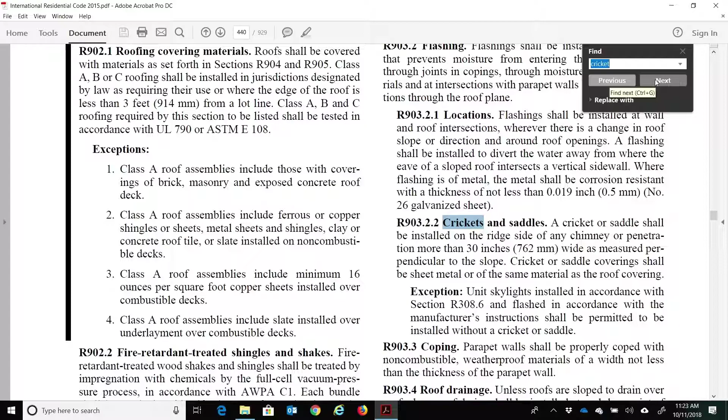When you take the certification exam, for the code part, the IRC part, it's a 30-question open book exam. You can use either the paper copy or the digital copy, but it's open book - you just need to know how to work your way through the code.

So that's what we're going to do in this presentation - we're going to teach you how to navigate through the IRC. It's important, though, for you as a chimney service technician to be familiar with what's in effect in your service area at home where you work.

That may not be NFPA 211, that may not be the International Residential Code. Nonetheless, technicians should be familiar with both of those documents, particularly NFPA 211, even if it's not in effect where you work. Our industry has adopted portions of NFPA, particularly the chimney inspection section, as kind of our standard. But again, you need to determine what's in effect in the areas you work in, obtain a copy of that code, and be familiar with it.

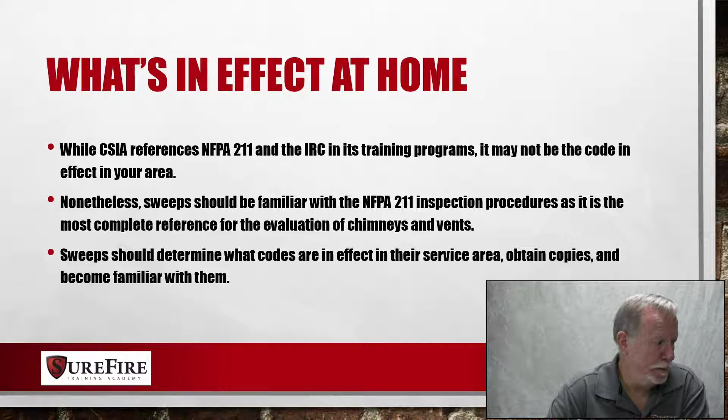So my challenge to you, if you're sitting here watching this seminar and don't know exactly what code is in effect where you work and what year edition - because most codes are updated every 3 years - make sure you have that information, make sure you have a copy of the code, and review it to be reasonably familiar with it. That's very important, particularly if you're doing any type of installation work. Your installations need to follow the current codes in the area where you work.

Just because somebody publishes a book, for example the International Residential Code, and it's available for sale, that doesn't mean that code is in force all over the world as 'international' would suggest. Codes must be adopted by some legislative body before they carry the force of law, and that might be your state government, the city or county level, or even the township level.

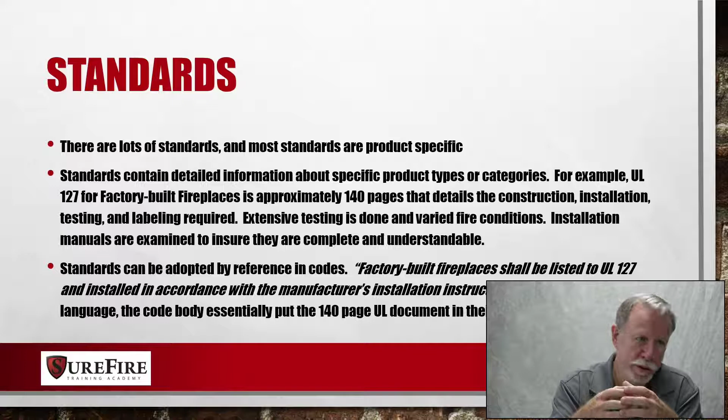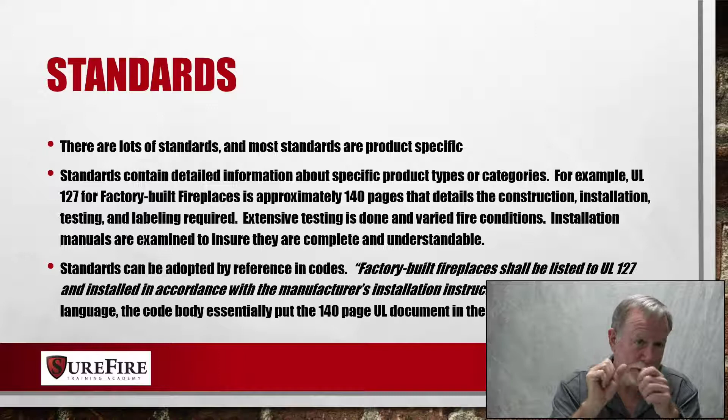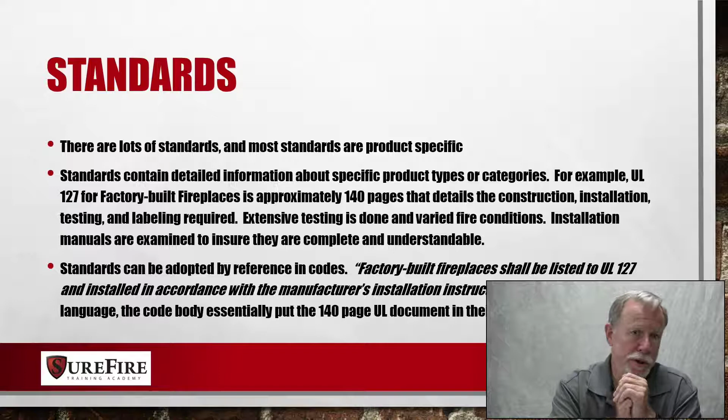The other thing is, in lots of codes, the International Residential Code, NFPA 211, they make reference to those standards. For example, the section on factory-built fireplaces in the code can be fairly short. It'll say something to the effect of: factory-built fireplaces should be tested and listed to UL 127 and installed in accordance with the manufacturer's instructions. By making that one reference in the code, they are able to bring in essentially all of the requirements from that UL 127 standard.

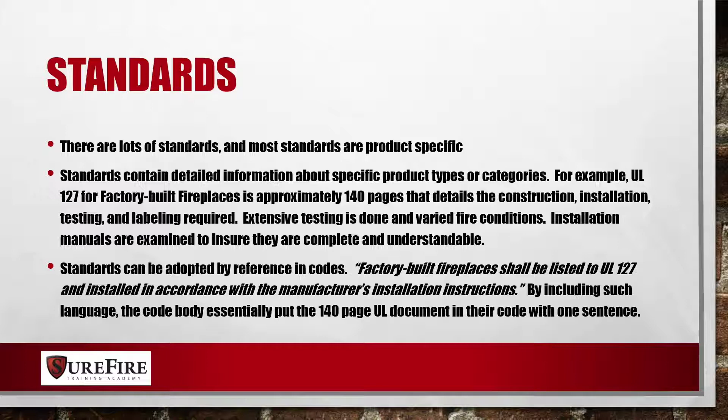Okay, let's look at some of the other standards available. UL 103 is the standard for factory-built chimneys. As already mentioned, UL 127 is the standard for factory-built fireplaces. UL 441 is the standard for gas vents. UL 641 is the standard for Type L low-temperature venting systems.

These are used primarily on some oil-fired appliances. UL 1482 is the standard for solid fuel type room heaters, i.e. wood stoves. UL 1618 is the standard for wall protection and floor protection systems. And UL 1777 is the standard for chimney liners. So those are some of the common UL standards in the hearth industry.

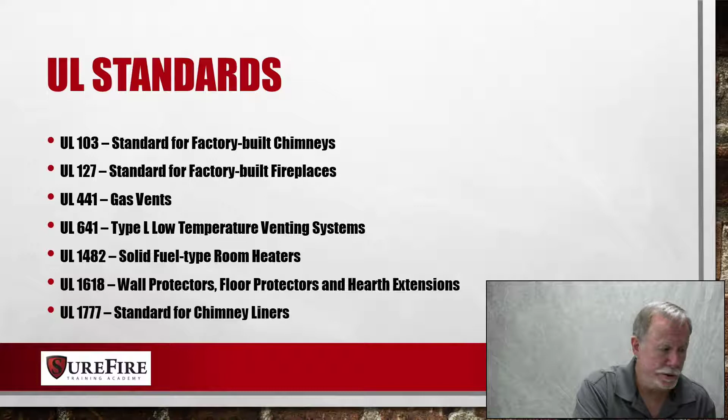You will also hear about ANSI standards, and these primarily affect gas-fired equipment. ANSI Z21 11.2 is the standard for unvented room heaters. ANSI Z21 50 is the standard for vented gas fireplaces. Z21 60 is the standard for basically gas logs, vented gas logs for installation in decorative fireplaces.

And then ANSI Z21 88 is the standard for gas fireplace heaters. These are heater-rated gas fireplaces, very similar in appearance to the Z21 50 fireplaces, but they've got some additional testing in terms of efficiency and heat output.

NFPA publishes a number of standards that you should be familiar with. NFPA 31 is the standard for oil burning equipment. NFPA 54 is also known as the National Fuel Gas Code, and it's all about the installation and venting of gas-fired equipment, including gas piping systems.

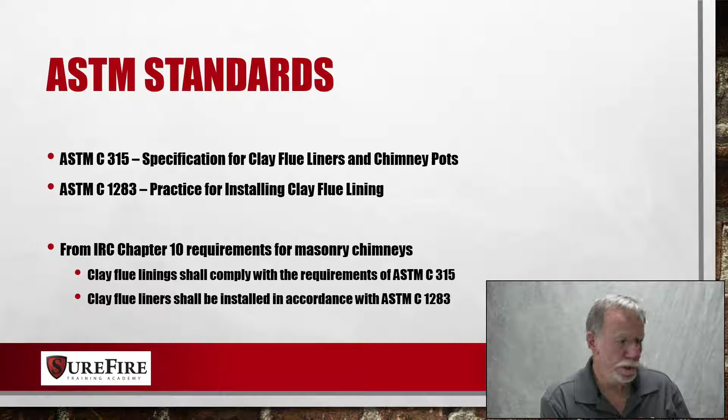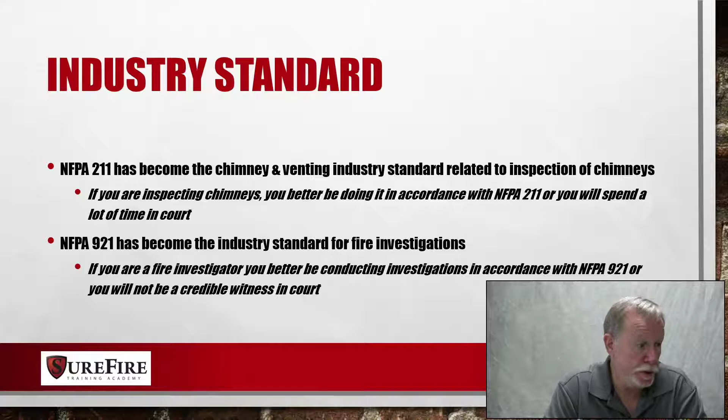And we should touch on industry standards. As I've already mentioned, NFPA 211 and the chimney inspection requirements have become an industry standard for the chimney service industry. Another document that has become industry standard is NFPA 921, an industry standard for fire investigators. All fire investigators follow this in terms of scene assessment, evidence preservation, chain of custody, and things like that. But if you're doing chimney inspections, you should be following NFPA 211 with reference to chimney inspections.

So when you do chimney inspections, what do you base the inspection on? What's your baseline for the inspection? I would suggest that you use current building code requirements for your area to create the baseline. The baseline is kind of the ideal subject - it's what you should be seeing in the field, the ideal chimney, if you will. So when you do your inspection, you want to compare what you actually see to the baseline. In order to recognize that something's wrong, you need to understand what it should look like. That's your baseline, and then you make your recommendations based on deviation from the baseline.

Also remember that codes provide a minimum requirement. They are the bare minimum that the code world, the industry, has determined - one way of saying it, the least acceptable requirements. You can certainly exceed those requirements. For example, the code says a chimney needs to be 3 feet tall. You can make it taller, 5 feet or 10 feet if you choose, and there might be reasons you need to do that. But as a bare minimum, the code says the chimney has to be 3 feet tall.

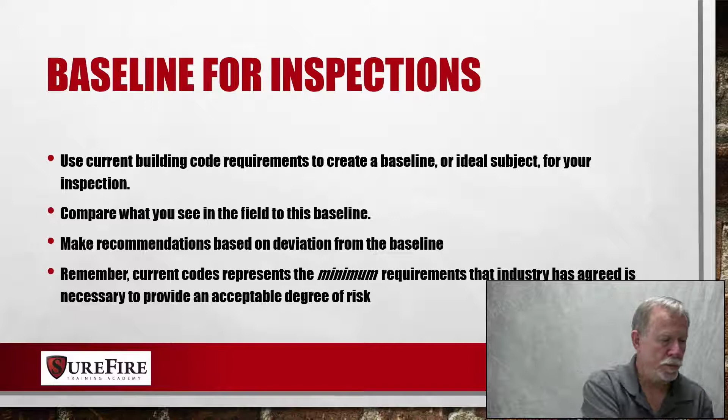Another concept we need to talk about is grandfathering, or more accurately, retroactivity. Most building codes have a section called retroactivity, or possibly existing structures, within the first couple pages of the code. Essentially it says the code does not apply to existing installations. In other words, don't apply a 2015 or 2018 code to a 50-year-old installation. If that installation was proper 50 years ago, it can continue to be used in most cases. There are some examples that supersede retroactivity, but in general it wouldn't be practical to go back and make corrections and rebuild parts of homes every time the code changes. That just wouldn't be practical. So that's what grandfathering or retroactivity is all about.

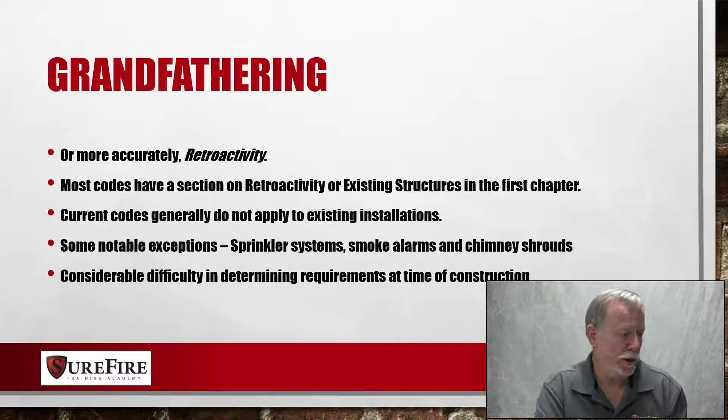The IRC, in section R102.7, existing structures, says the legal occupancy of any structure existing on the date of adoption of this code shall be permitted to continue without change, except as specifically covered in the code, the International Property Maintenance Code, or the International Fire Code, or as deemed necessary by the building official for the general safety and welfare of the occupants and the public.

A couple examples. Fire sprinkler systems is one. There were lots of buildings built before fire sprinkler systems were required. But by and large now, most areas of the country have said that public buildings, and certainly dormitories, colleges, hotels, motels, have to be retrofitted with sprinkler systems. This is an example where the industry as a whole thinks that's necessary, and that the expense of retrofitting these existing installations is a beneficial expense in terms of life safety.

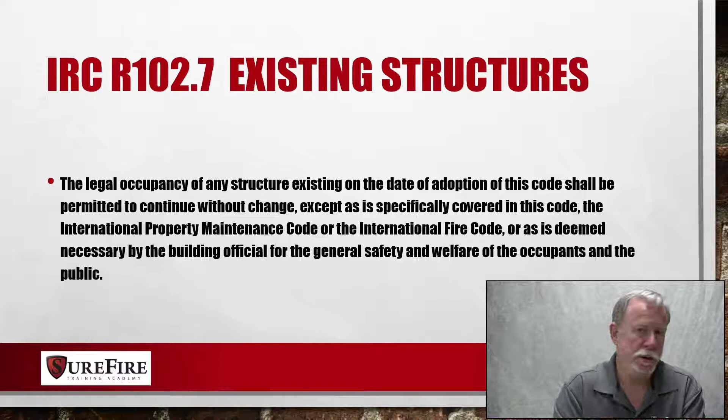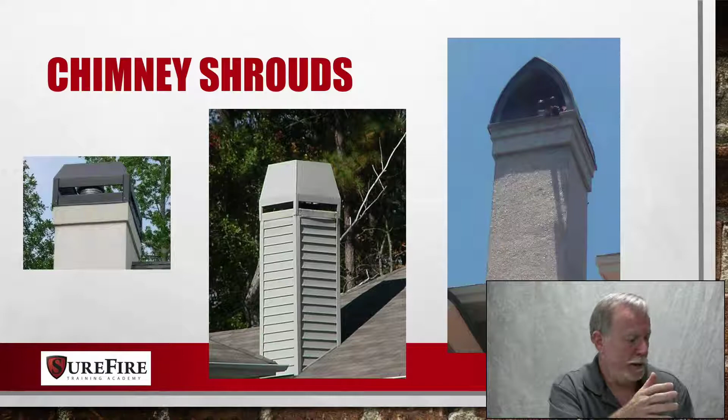Closer to home and closely related to our industry, I want to talk about chimney shrouds. These pictures illustrate some common chimney shrouds, which is basically a decorative housing around the top of a chimney. What all of the current codes say is that decorative shrouds shall not be installed unless they're listed for the fireplace or chimney system they're being used with.

But keep in mind, most of these codes, the IRC, NFPA, for the most part, are installation codes, and their requirements apply to new installations. An interesting requirement, though, found in the International Fire Code, says that decorative shrouds installed at the termination of factory-built chimneys shall be removed except where such shrouds are listed and labeled for use with that specific factory-built chimney system. So that is clearly superseding retroactivity. The fire chiefs of the nation have determined that these shrouds pose a significant risk and that they should be removed unless they're listed for that system.

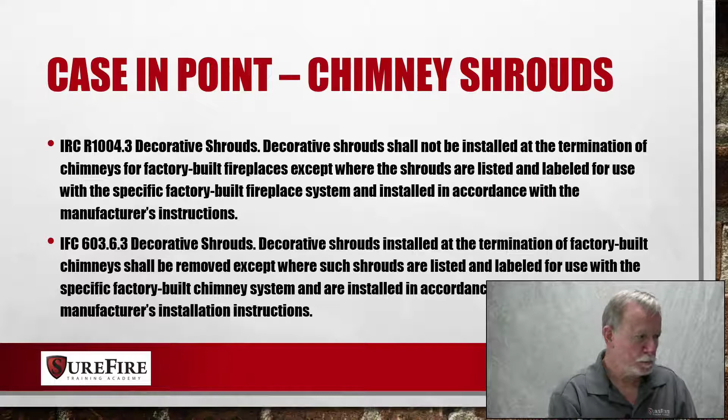Another topic we need to talk about: it's fine to say something is grandfathered or that the code doesn't apply to it, but we also have to use good common sense and recognize that codes have changed primarily based on fire loss experience. If a number of fires occur because of a particular thing happening, pretty soon the building codes are going to be changed to prevent that from happening.

So we know that building codes evolve based on fire loss experience and are typically changed for a reason. If you're working in a 100-year-old home that doesn't have a chimney liner, it's not proper to say the building code requires you to install one, because that's not quite true. Retroactivity would allow that to continue to be used. But what you can say, and probably should say, is that current industry wisdom is that unlined chimneys simply pose too great a risk. The common understanding is that unlined chimneys just aren't safe and something better exists, a chimney liner. So you can tell them that you highly recommend its installation. Chimney liners are proven to make chimneys safer, and you think it's a great idea and would recommend they do this. Just don't say they're legally required to do it because the code says so. If it was legal when it was built, in most cases it can continue to be used.

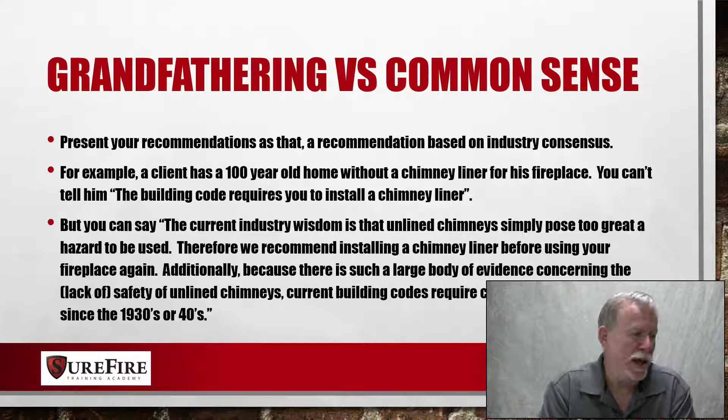So we've talked about an introduction to the IRC and a little bit about codes and standards in general. In the next section, we will talk about the layout of the International Residential Code. So let's go ahead and conclude there, wrap it up, and we'll be back for part 2.